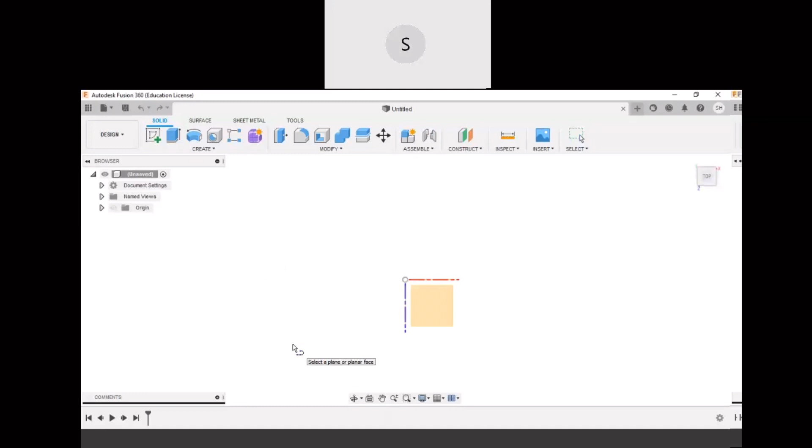First I will select the top view since it's easier to sketch in 2D, and I will do a line, then choose the plane to plot the points here.

Let's start with this point. I'll take this point and draw a line with a dimension of 80 mm per side, creating a square inside first for the first part to make it easier, with a dimension of 80 mm.

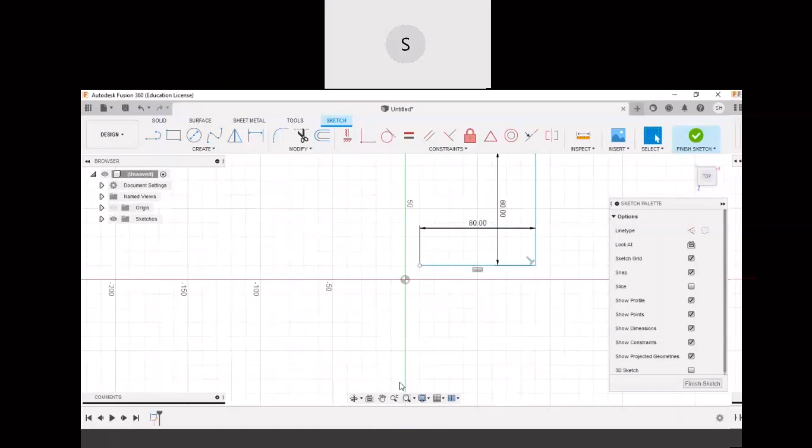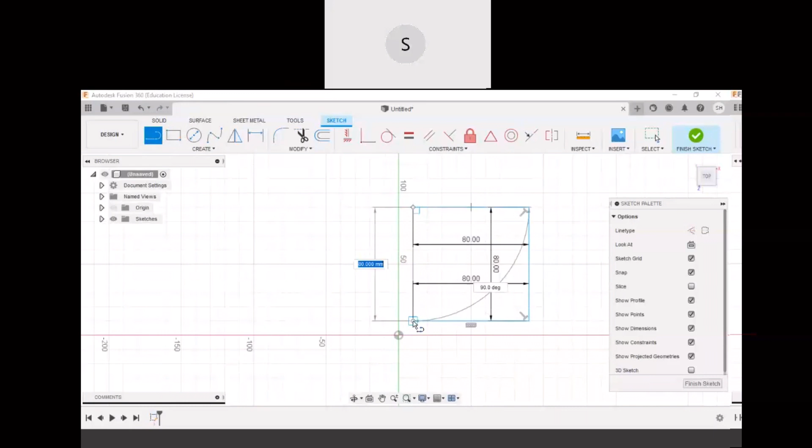Same goes for this one. Then I will continue by removing the dimension first because it looks messy and I don't really like it.

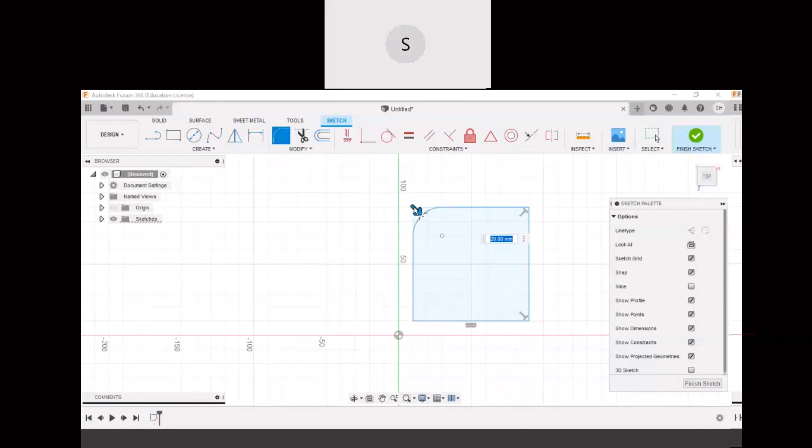Next I will start doing the fillet for the upper corner and the lower corner with a radius of 10 mm each.

After that, I'm going to trim the down corner, but first I will create a line as a reference line for me to trim later, with a side to side dimension of 12 mm.

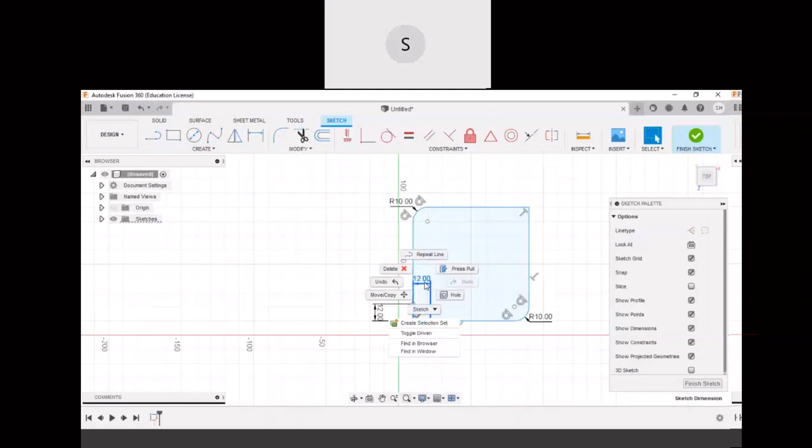After removing this dimension, I will connect those two lines that I created as reference lines just now, and then I'm going to trim it.

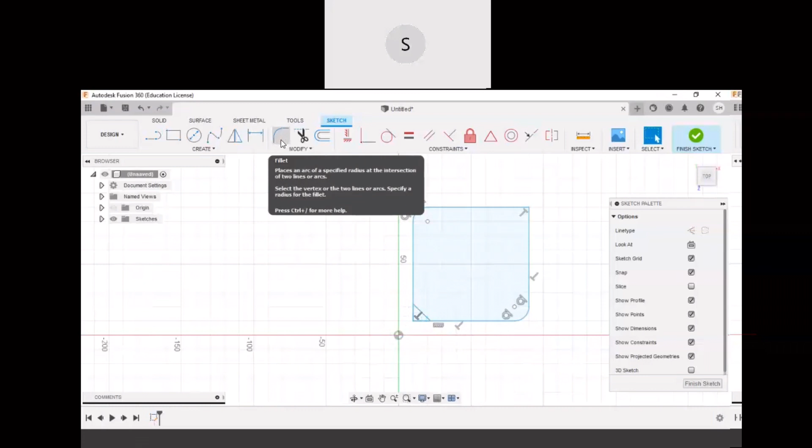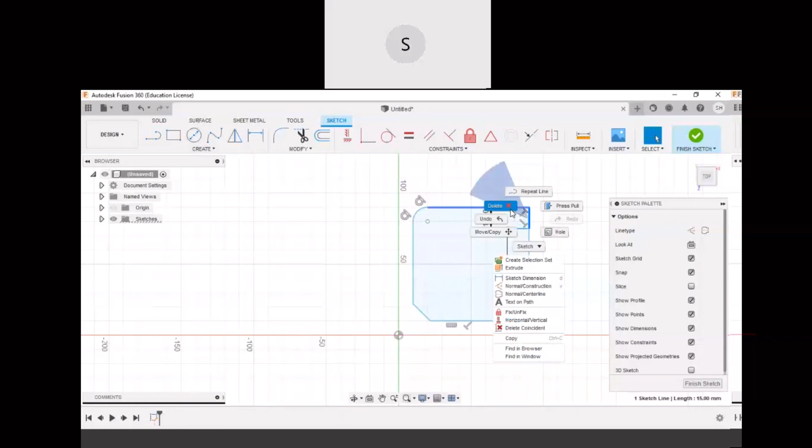Next, I'm going to create a circle with a diameter of 8 mm.

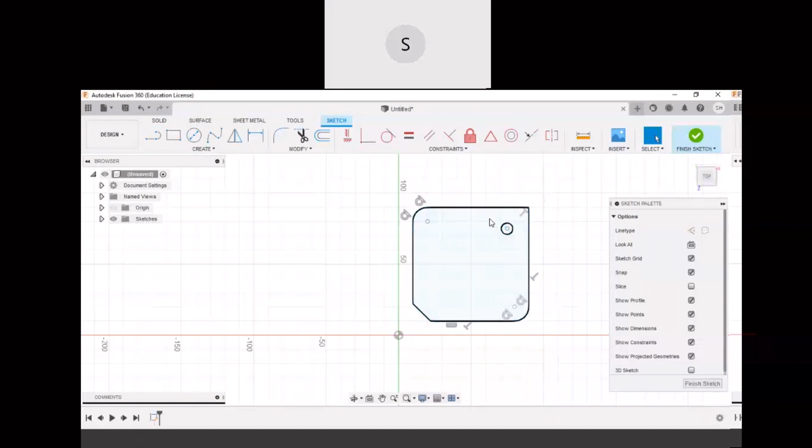To create another hole here, I will plot a line as a reference line again, also to the left, 50 mm.

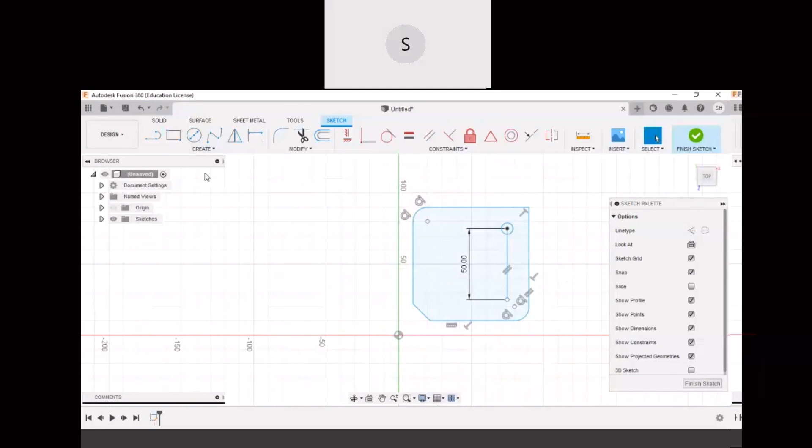I'll create another circle with the same diameter of 8 mm. Now I'm finished designing the inner part of the plate.

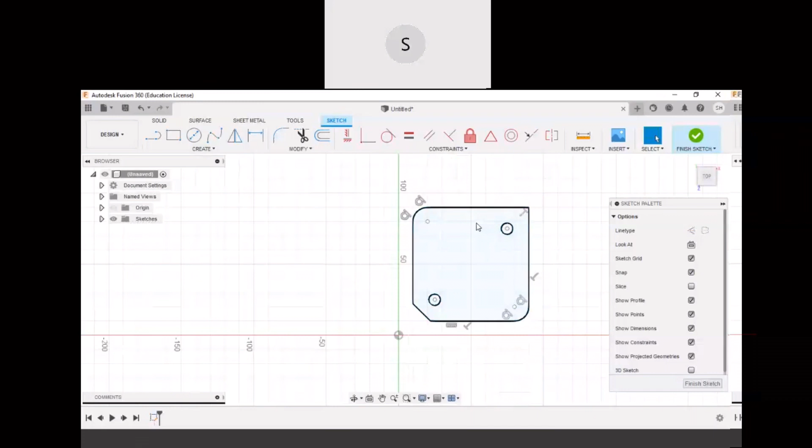After this we are going to extrude this plate. I will select the surface first and choose extrude upward for about 5 mm. So this is our first solid, it's already done.

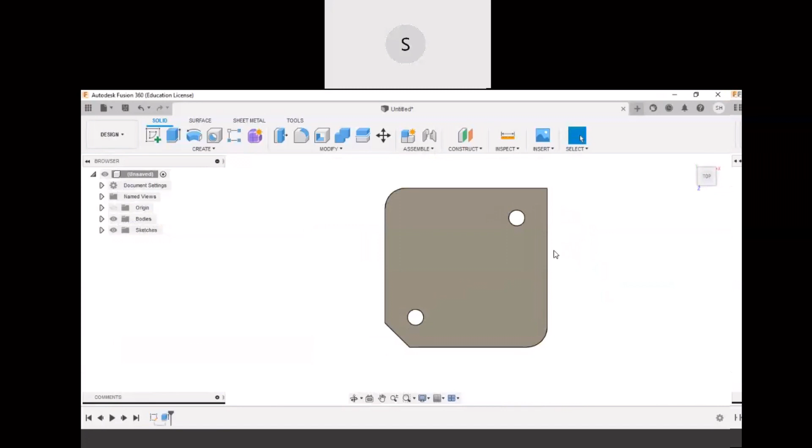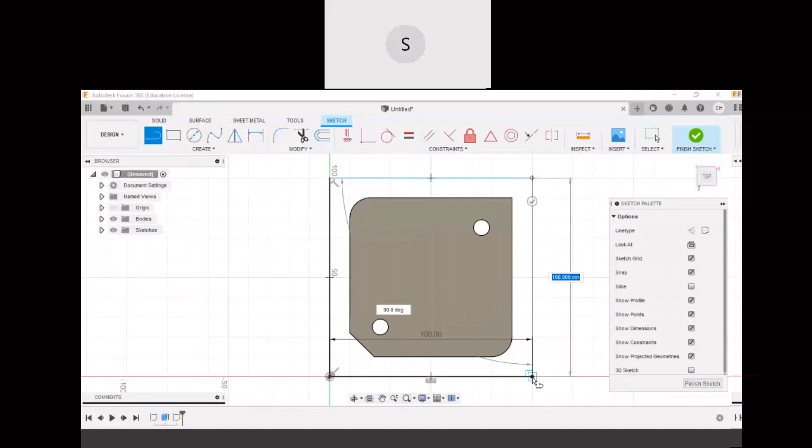We are done with the outer part, and now we are going to extrude downward for the outer surface.

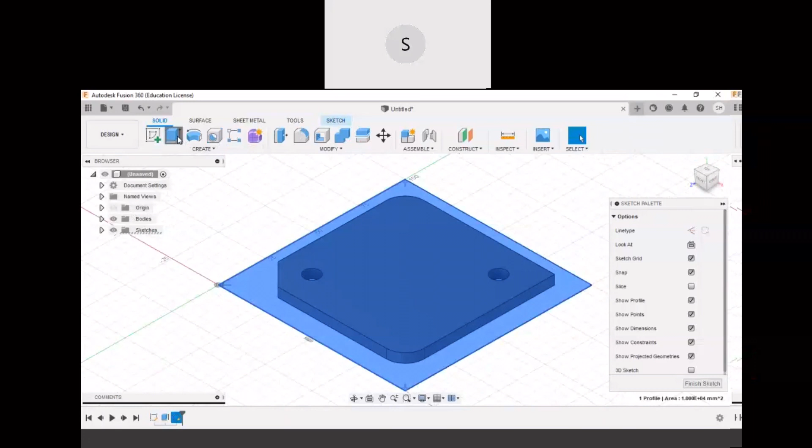Again we extrude, but this time downward with a net value of -7. We'll check it - as you can see in the picture the hole is not going deep down, so we are going to extrude it as well with -7.

Same for the other circle. That's done, we already get the shape that we want here, as you can see there are 2 holes over there.

Now we are going to choose manufacture and setup. Next we are going to click on setup and new setup.

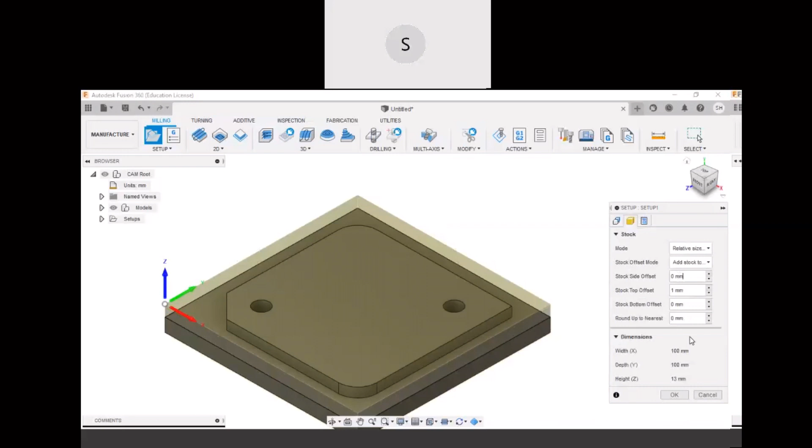We are going to place the stock point at the corner, and ensure that the Z arrow is pointing in the upward direction.

After we set the stock point, now we are going to choose face, then select tool. We choose milling here, and we will choose face mill with metric units and a 50 mm tool. Like this, and press OK.

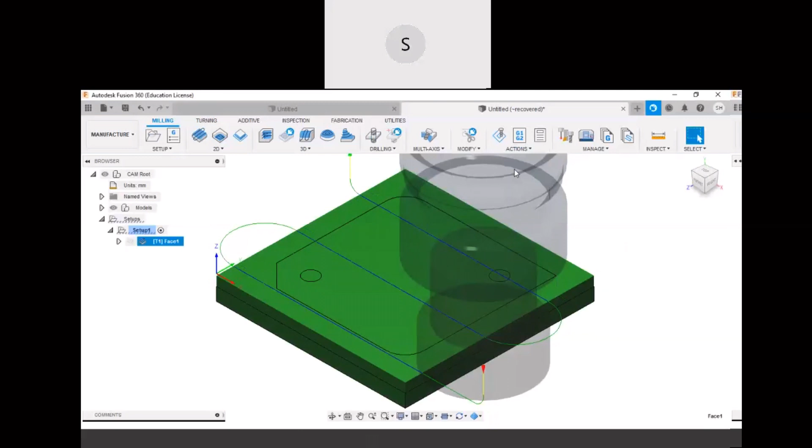Then we will see the simulation here. Okay, everything's good.

Now we are going to proceed with the 2D pocket. For 2D pocket we are going to select tools again, same thing, also milling, but now we are going to choose flat end mill, metric, and choose 10 mm.

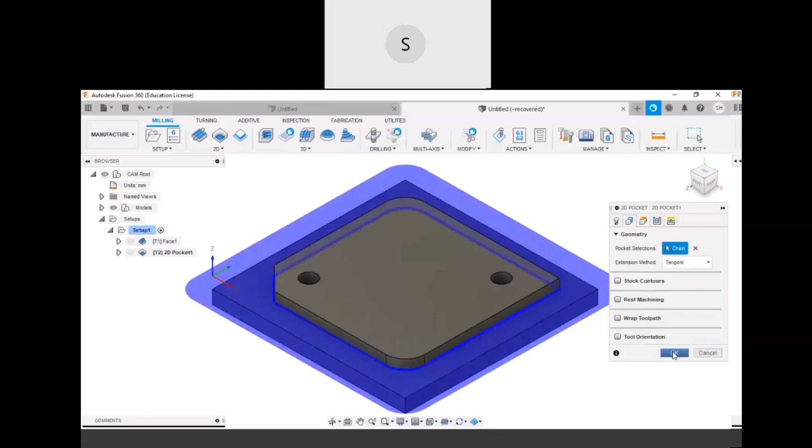Go to action and choose simulate. So that is the line up to mill the surface.

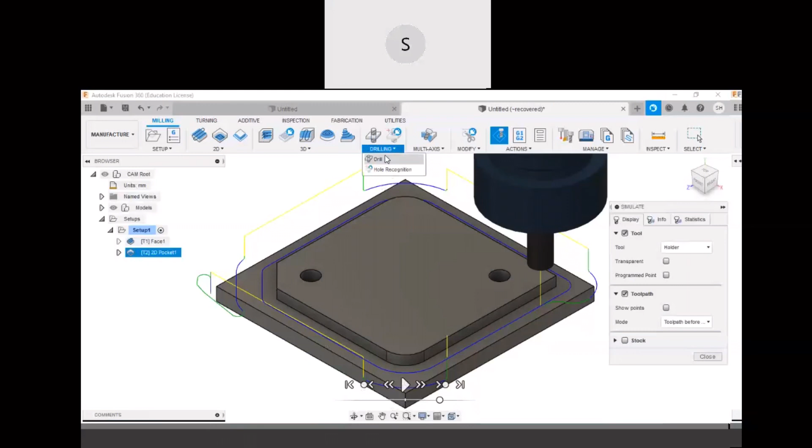Lastly we will proceed with drilling. Choose drill, tool, we choose hole making and drill, and for the diameter we should select we will put 8 mm.

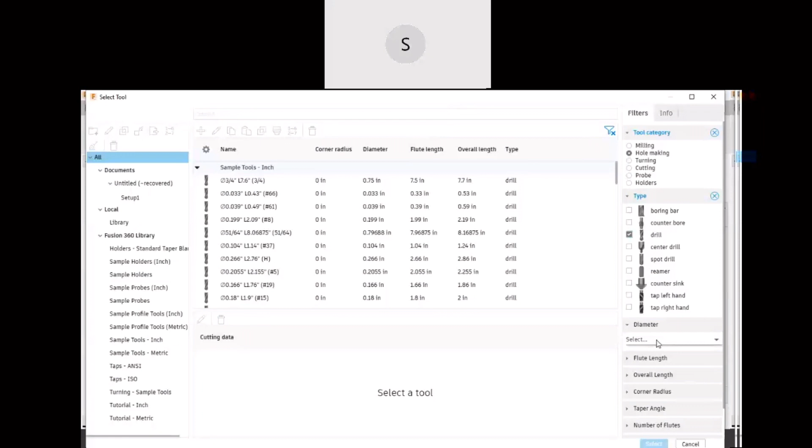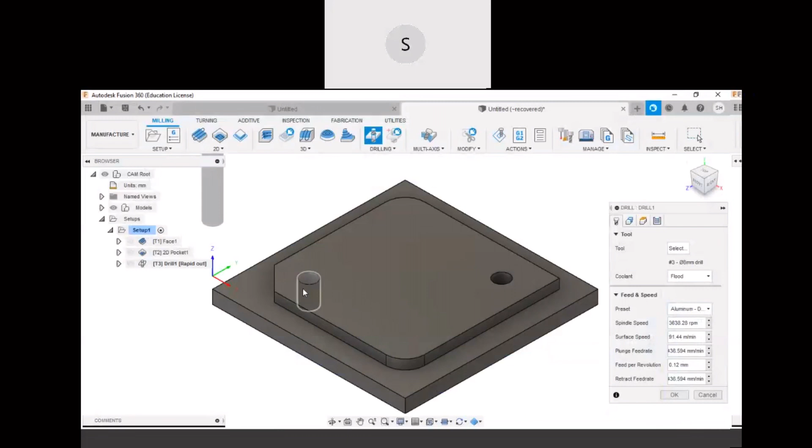Press equal first and then insert 8 mm. Enter - that's the drill that we want, so we will click it and choose the hole that we want to drill.

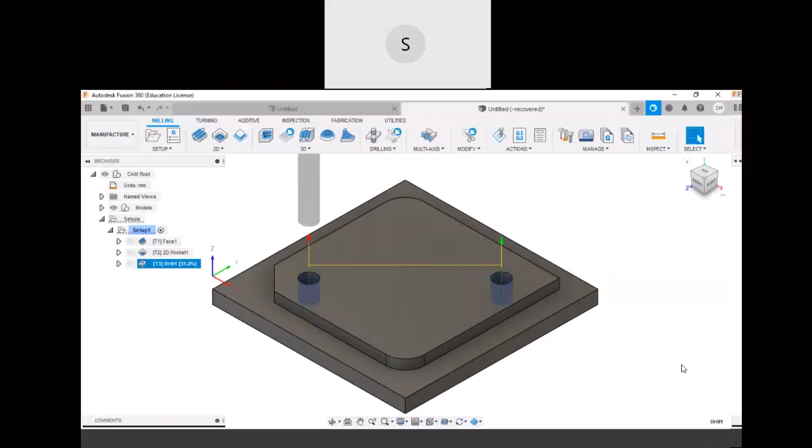And we'll press OK here. Again we will check it by simulating. Everything seems fine here.

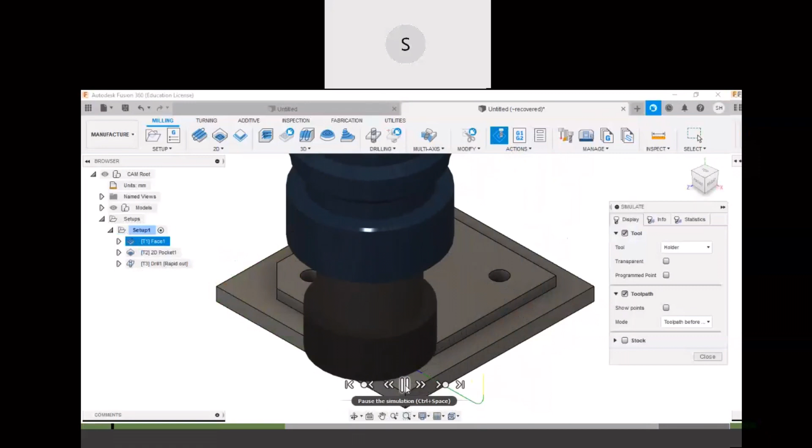Now we are going to simulate from the beginning. So first we'll start with face and proceed with the 2D pocket, and lastly will be hole making.

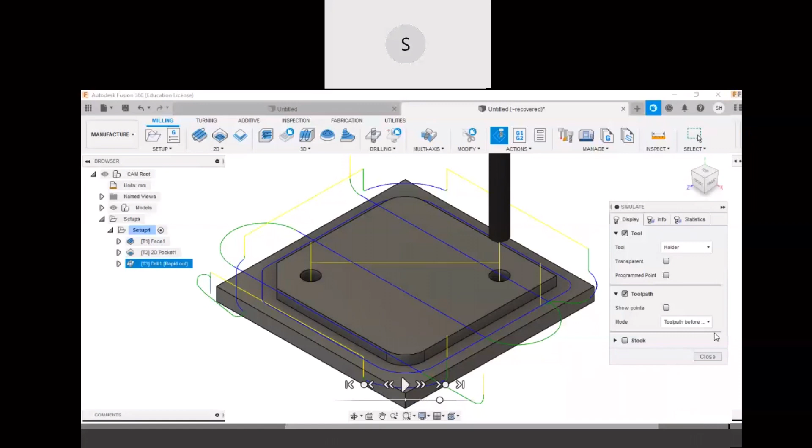Then we will close this. Now we are going to generate the G-code for this prototype.

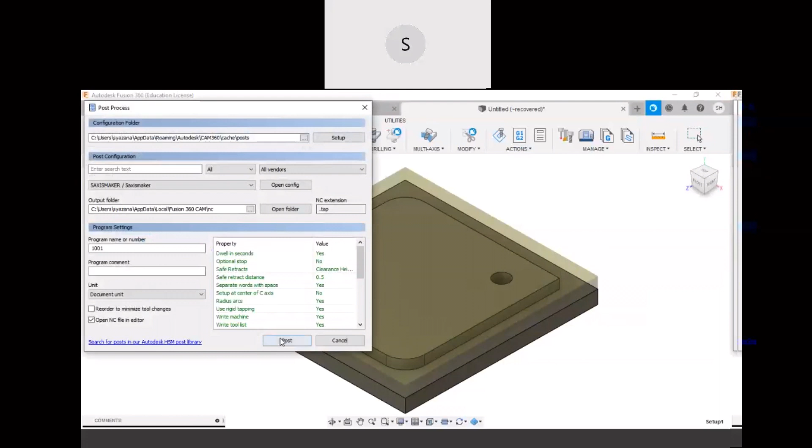Select post process first, then post. You should save this first if you want to see the code.